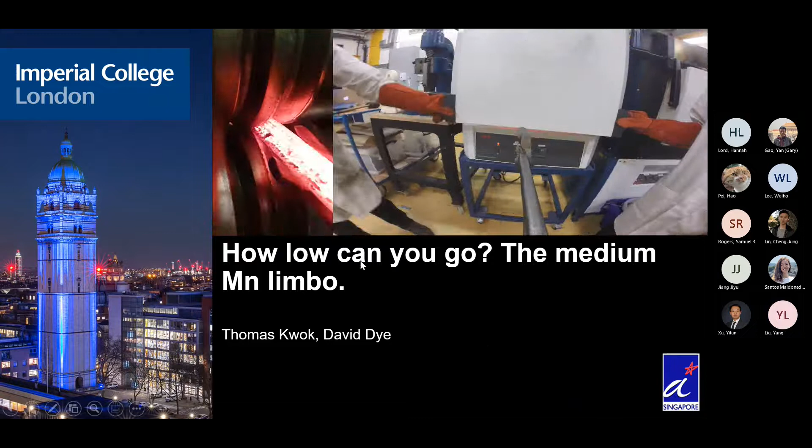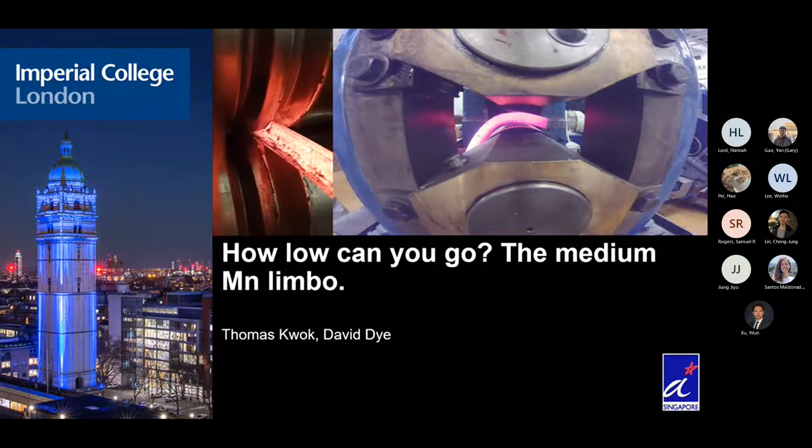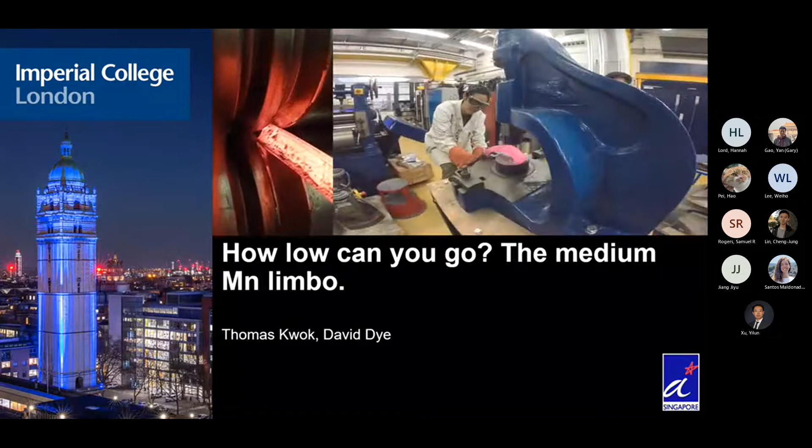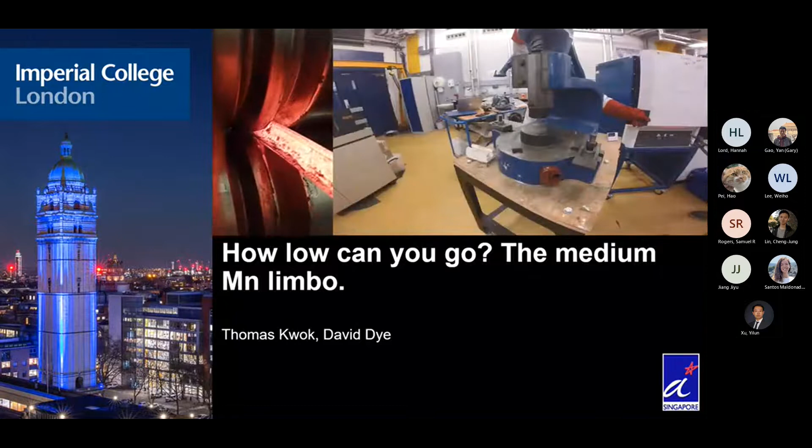So today we have Dr. Thomas Kwok. He finished his PhD here in October 2022, so congrats again. He also did his bachelor in engineering at Imperial College, and after he finished in 2015, he went back to Singapore and worked as a research engineer at the Singapore Institute of Manufacturing Technology, which is a research institute under A*STAR, the Agency for Science, Technology and Research. In 2018, he got an award in the National Science Scholarships, and this allowed him to come back to Imperial and pursue his PhD. So now we're going to have his wonderful talk, and I'm hoping that you would enjoy it.

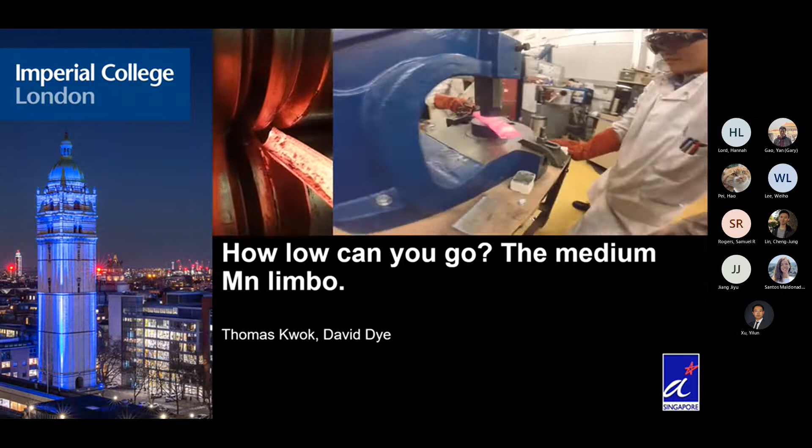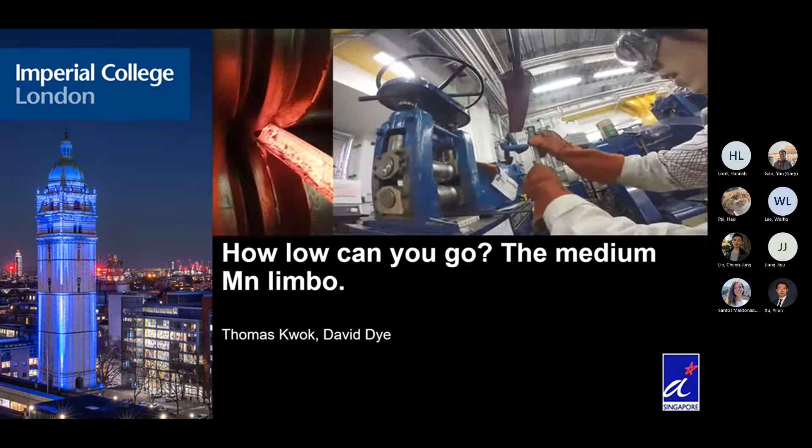So my name is Thomas, and today I'll be giving a talk on the medium manganese limbo, which is really about how do we preserve the TWIP effect in these medium manganese steels with decreasing manganese content. This work was mostly done by myself, also with Dave, and also our collaborators. And before I begin, I just want to thank A*STAR for very kindly sponsoring this PhD.

So a little bit about myself. After my A-levels, I went to join the Singapore Army for 2 years when I was an artillery officer. It was a good character-building experience, but never again. After that, I came here to this very same department to do my BEng in material science, and this is where I met the boys. So I met Yanis, Benwood, Mezan, and also Dave.

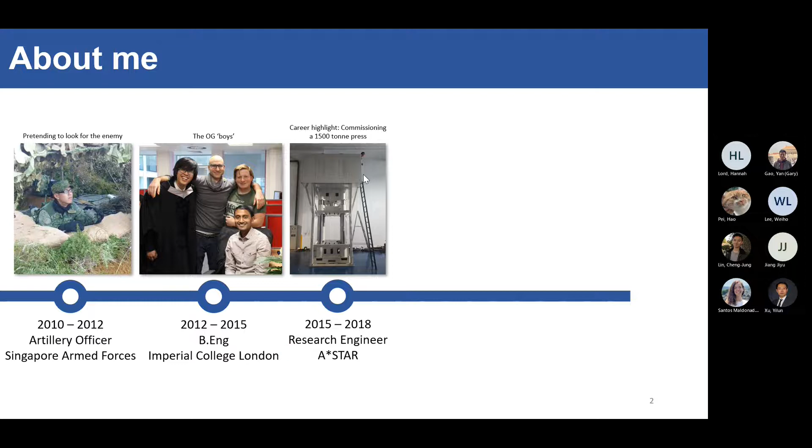And this was really when the medium manganese journey actually began, starting way back in 2015. I went back to Singapore to work as a research engineer in A*STAR, and what I was working on was the squeeze casting of aluminium and magnesium alloys. One of my career highlights was helping to commission this epic press. So that over there is our client, our happy client, standing on top in the oil box, and that gives you the scale of the size of these machines. After that, working in research, you feel that you need a PhD to really get anywhere.

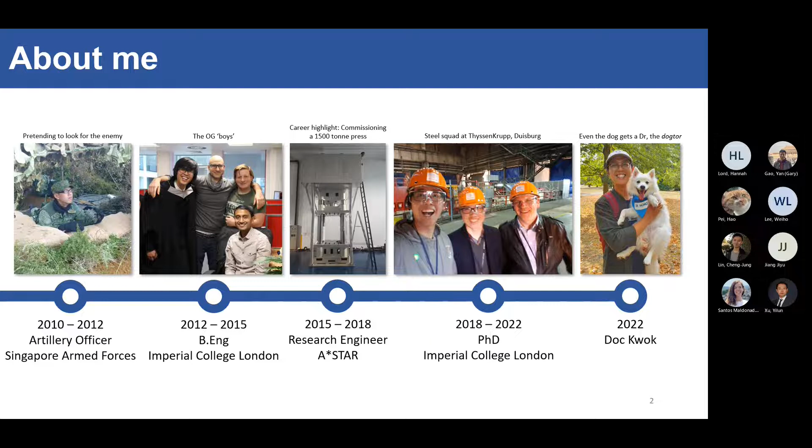So I came back, working with Dave again on high strength steels, and this is the steel boys enjoying a day out at ThyssenKrupp in Germany. And then finally, earlier this month actually, finally I'm Dr. Kwok, or Doc Kwok for short.

Okay, so I thought I'll do something a little bit different this time. Whenever you come to a talk, you only present the nice, shiny results, right? So I'm going to try and big up myself and look a bit like Iron Man, present all the nice stuff. But I've also been on that side of the lecture hall looking at talks like these, just constantly being overwhelmed, thinking to myself, there is no way I will ever be good enough or have good enough results to present in a talk like this. So during this talk, if you ever see a blue banner on the right side, I'm just going to present a little bit of the behind-the-scenes actions, just to show you that these results didn't just drop out of nowhere. There was a lot of work behind it. And if I can do it, so can you.

All right, okay, so some very quick steel metallurgy recap. So here we have our iron carbon phase diagram. When you solidify steel, first you form your delta ferrite right at the top, and then it transforms into austenite, that's your FCC phase. And then you get alpha ferrite, which is your BCC phase. You will notice that martensite is not in this phase diagram because martensite is not an equilibrium phase.

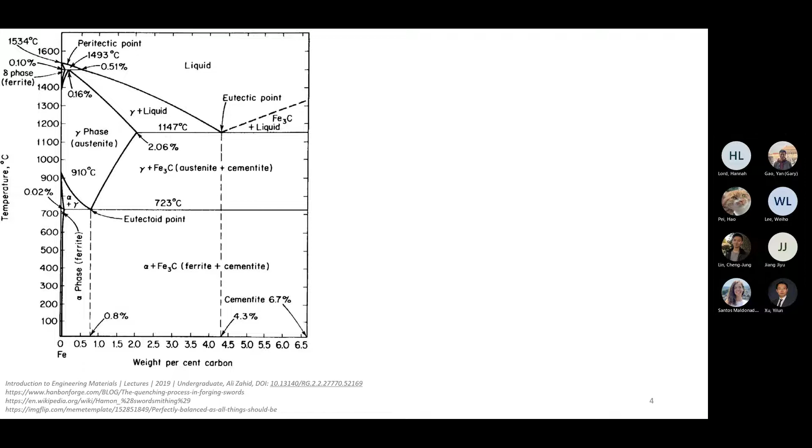You get martensite when you heat your steel up to the austenite phase and then quench it down. Your FCC crystal tries its best to transform into BCC, but it can't really do it because of all the carbon in the way. That's where you get martensite, a very hard and also very brittle structure.

The other way you form martensite is when you have metastable austenite, stabilized down to room temperature. It's metastable because if you give it a bit of stress or strain, that gives it the energetic kick to form martensite at room temperature. That's a very gross oversimplification of the TRIP effect, or transformation induced plasticity effect.

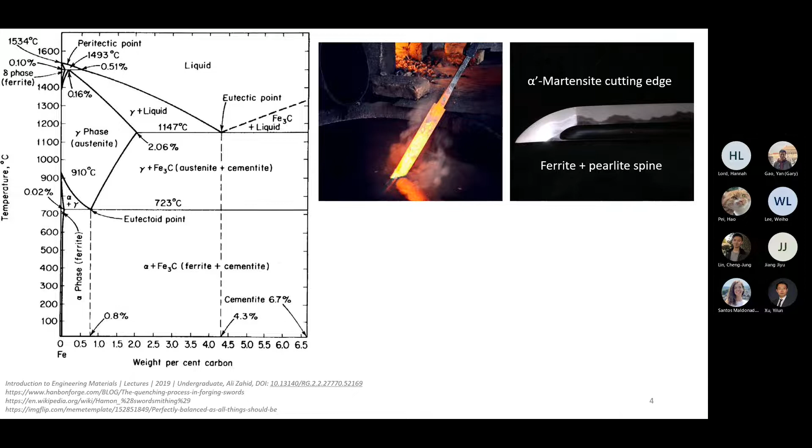In steels you also have more alloying elements other than carbon: manganese, nickel, chrome, aluminium, silicon. These elements split into austenite stabilizers, which make the austenite window bigger and can even stabilize the austenite phase down to room temperature, and ferrite stabilizers, which do the opposite and make the austenite window smaller.

These austenite and ferrite stabilizers affect things like austenite stability, meaning stability against transformation into martensite, and also stacking fault energy, which affects the TWIP effect, which I'll talk about later. Depending on the plasticity enhancing mechanisms you want in your steel, your austenite and ferrite stabilizers have to be perfectly balanced, as all things should be.

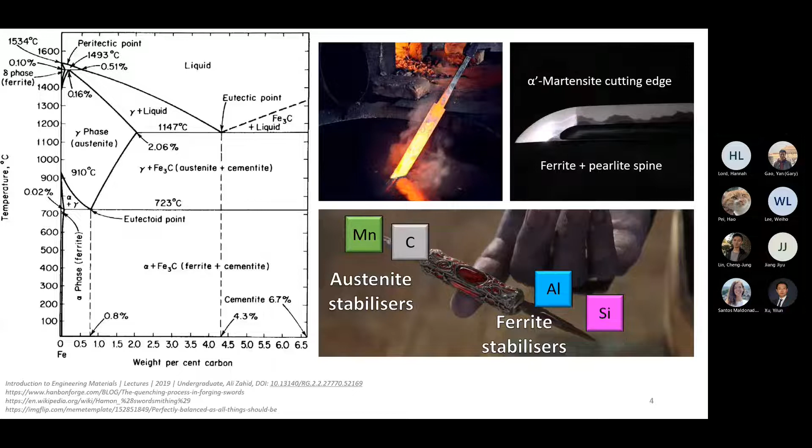My talk is about medium manganese steels, which really implies the existence of high manganese steels. These high manganese steels are about 16 to 30 weight% manganese and also quite high carbon content, about 0.5 to 1 weight% carbon. When you deform them, in addition to dislocation glide, you form these very nice twins.

These twins are very fine, and you see these red lines here in the IPF map. That's actually a bundle of twins, and within that red line there are even finer twins. What these twins do is continuously fragment your grain.

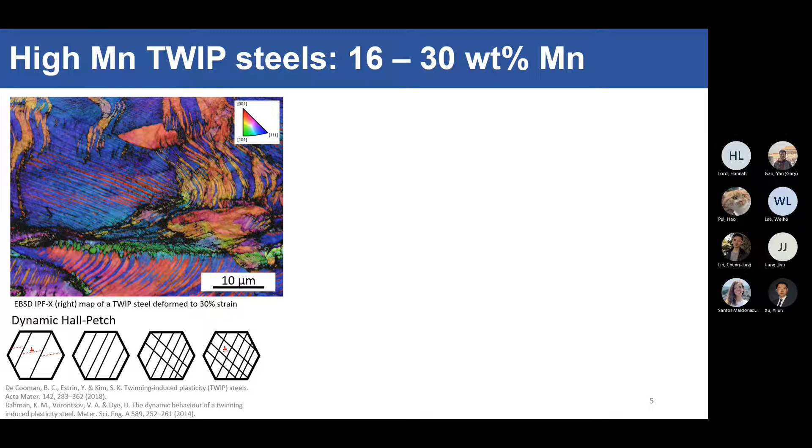You keep chopping up the grain into smaller and smaller parts in what is called the dynamic Hall-Petch effect. You start straining, form two twins, which refine the dislocation mean free path. Strain it some more, you get more twins, then activate a second twinning system. Eventually your mean free path is so small the dislocation finds it very hard to propagate, and that's where you get strength from.

If you look at the tensile curve, TWIP steels have massive elongation. That's because of the TWIP effect giving continuous hardening all along the tensile curve. This is the fully recrystallized version. You can trade some of the elongation for strength, making it very strong, up to more than 1 gigapascal.

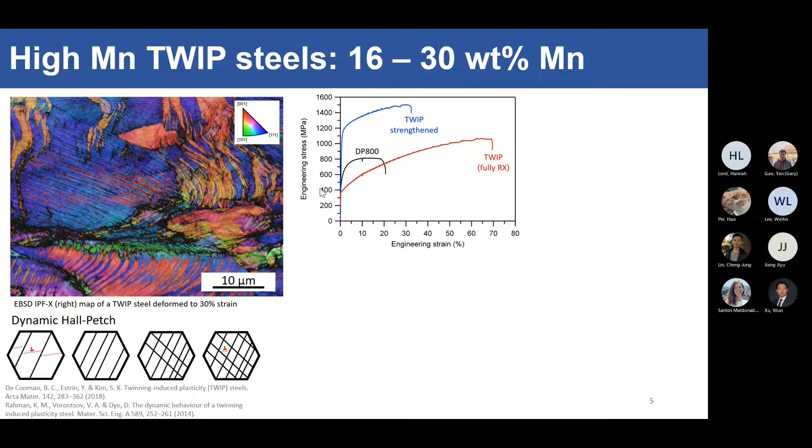What these TWIP steels are really good for is absorbing energy. If you think of energy absorbed as the area under the stress-strain curve—this should be engineering true, but never mind—these steels absorb a lot of energy when they deform, much more than the DP800 steels, which is the current energy absorbing steel in your cars right now.

Somebody did an actual test called the axial drop tower test. You make a box of steel, drop something heavy on top in a very Tom and Jerry kind of way, and it falls and crumbles like that. You can see TWIP steel is by far the best energy absorbing steel. The idea was to put them in cars, like your crash box, in this part over here.

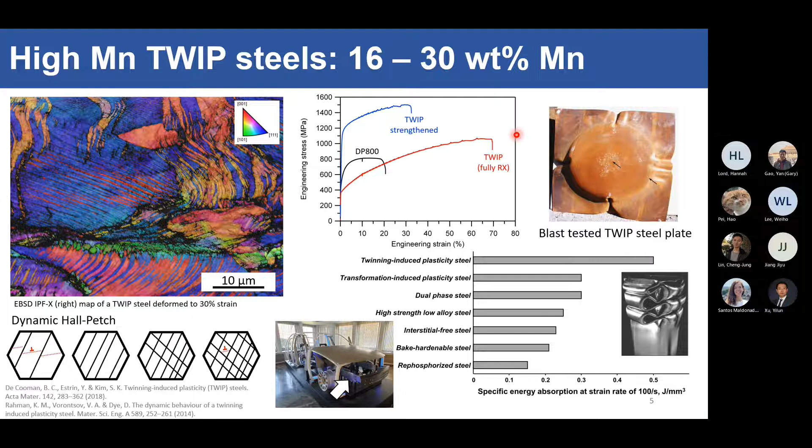If you can absorb crash energy, you can absorb blast energy as well. This is a plate of TWIP steel made by Tata Steel, and a few years ago Dave and Mazan went to blow it up. You can see that the TWIP steel was actually very capable of absorbing that blast without cracking.

So if TWIP steels are so awesome, how come we don't see them everywhere? That's because TWIP steels are incredibly hard to cast and fabricate—this is a very high alloy steel, right?

If you cast a very high alloy steel, you get massive segregation to the interdendritic boundaries. This is some work by Aachen University. They have this really crazy forging and annealing strategy to try and homogenize the ingot, and you can see there's a large variation in manganese even after their homogenization strategy. This means you have different stacking faults in your austenite phase, and locally you have different TWIP effects going on, and that's not good.

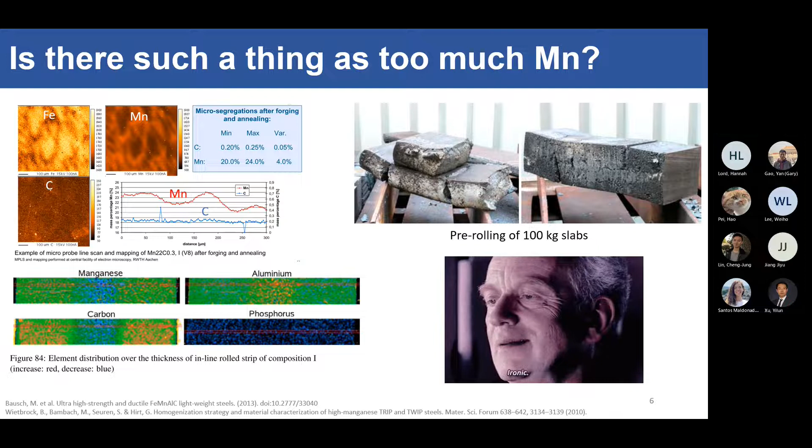If you don't homogenize it properly and just decide to roll it anyway, your ingot breaks, so you have very poor hot ductility. But even if you try to homogenize it properly and manage to roll it, you still have very large segregation of manganese, aluminum, and carbon as well. So it's extremely ironic that the high manganese content, which enables the TWIP effect, is also what's hindering the widespread commercialization of these high manganese TWIP steels.

So the research question now becomes: can we make a manganese-lean TWIP steel? TWIP good, too much manganese bad, right? So can we make it with less manganese and see what happens? And the answer is yes, otherwise I wouldn't be presenting today.

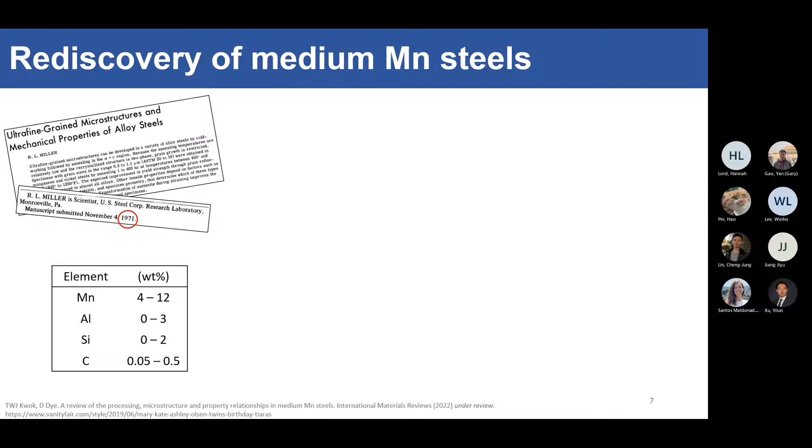Back in 1971, this solo warrior R.L. Miller actually made the very first medium manganese steel. In fact, we're actually rediscovering his work right now. Modern medium manganese steels now have 4 to 12 weight percent manganese. This is a big reduction of manganese content compared to your TWIP steels, which was 16 to 30 percent. So we are at way, way lower levels right now.

The key to medium manganese steels is this thing called element partitioning. Because we've reduced the amount of austenite stabilizers, your microstructure is now both austenite and ferrite at the same time, it cannot be fully austenitic anymore. So if you take your steel and heat it into the two-phase regime, what happens is that your manganese and carbon partition into the austenite, while aluminum and silicon partition into the ferrite phase. You hope you can enrich the austenite phase in manganese and carbon to a sufficiently high level to enable twinning.

You can actually simulate this in Thermocalc. You can plot the phase fraction evolution with temperature, then plot the austenite composition with temperature, and then plot the change in stacking fault energy with temperature. So this means that if you do an intercritical annealing heat treatment between 650 to 750 degrees, you might have your stacking fault energy just high enough to enable twinning in this particular steel.

So again, the research question becomes: how do we adjust composition and play around with processing parameters that really promote twinning in the austenite phase in medium manganese steels?

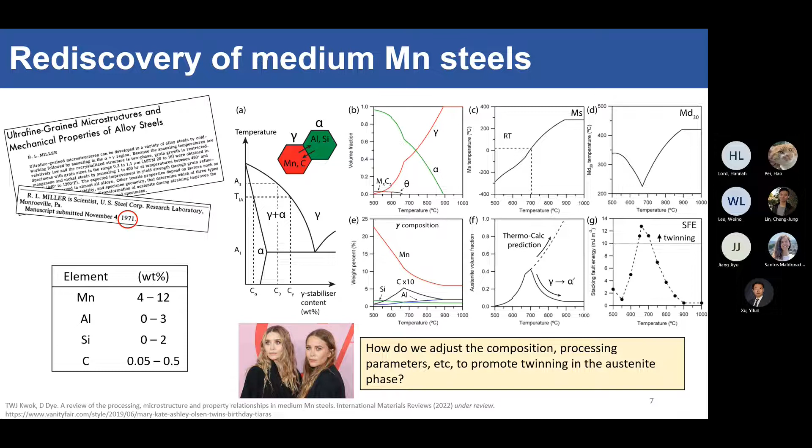This is the first steel that we developed, with 12% manganese. This steel I developed in my undergrad and then finished off in my PhD. So there's a long history to this steel.

For this steel, we warm rolled it at 700 degrees, which is within your two-phase region. What this does to the microstructure is elongate your austenite grain, and with every pass you add something called a necklace layer around it. This necklace layer is a layer of very fine austenite and ferrite grains, because you don't have enough energy to cause full recrystallization, so it only recrystallizes on the outside. With every pass you add a layer, and a layer, and a layer, until finally you have a microstructure that looks like this: a very highly deformed austenite core surrounded by necklaces of very fine ferrite and austenite grains.

Now we do a tensile test, and we realize that, number one, you've got absolutely stonking strength, more than 1 gigapascal. And you've got more than 50% elongation, which is massive.

You can see that the deformation has two stages, a flat bit and a diagonally increasing bit. We did some interrupted tensile testing to find out how the microstructure evolves and how that affects the tensile behavior. I had a magnifying glass for this, but I can't do it on the big computer, so you'll have to trust me on this.

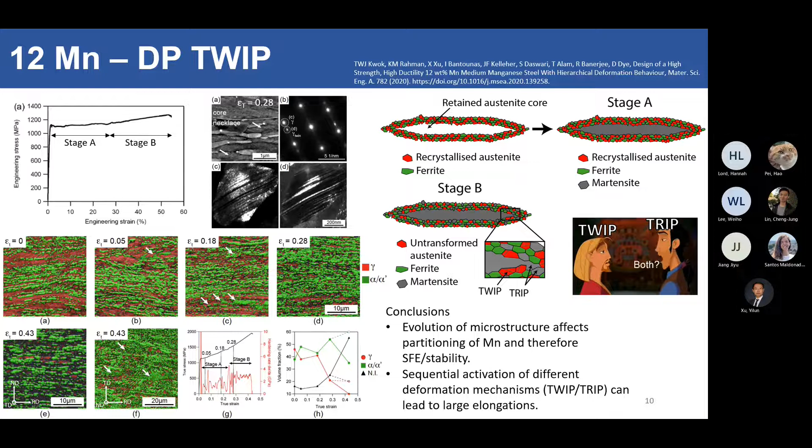What this tells us at the end of the day is that the evolution of microstructure actually affects the partitioning of manganese, which then affects things like austenite stability and stacking fault energy. But more importantly, we can use the TWIP and TRIP mechanisms together to give very large elongations in medium manganese steels. This TWIP plus TRIP mechanism we found is really, really good, but we want both of them to occur together in the same grain.

We don't want some grains tripping and some twipping, because that gives you this very horrible serrated tensile curve, which is not good for metal forming purposes. So we want TWIP and TRIP to be occurring within the same austenite grain.

Literature says you can do this in two ways. You can have it in the successive manner: you form the twins first, and then the twin intersections become very potent nucleation sites for martensite to form. The twins crossing each other don't immediately lead to martensite, but they form a potent nucleation site. If you're from my part of the world, that actually looks like Ultraman, don't you think? Okay, never mind, moving on.

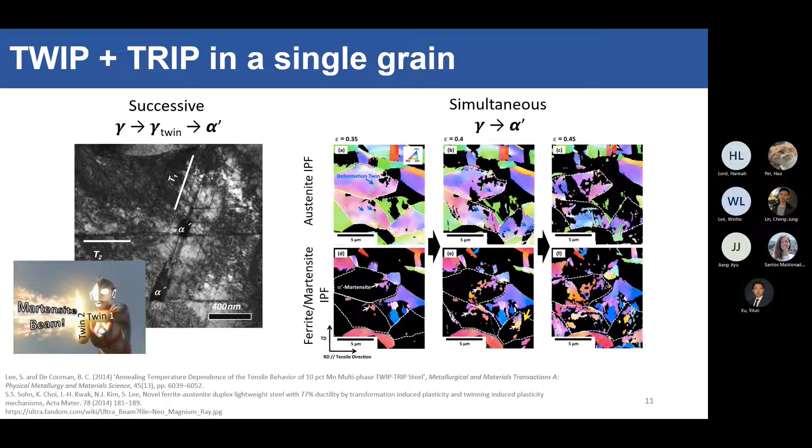The other way to form TWIP plus TRIP is the simultaneous effect, meaning your twins and your martensite form together independently of each other. There is no relationship between the twinning and the tripping together. So there are two ways to form this TWIP plus TRIP mechanism.

So we move on to our next alloy, 8 manganese this time, coming down from 12 to 8. This is the 8 manganese steel that I lovingly call Novalloy, it's the novel alloy, hence Novalloy. This is also quite a highly alloyed steel, with very high aluminum and silicon content, and similarly quite a high carbon content. We've deliberately added tin, as it's been reported that tin helps the galvanizability of this steel.

In the as-annealed condition, you can see we've got again very nice high strength, 1 gigapascal, and also 40% elongation. Somebody once came up to me and said, do you ever cold roll your steels? I said no, why do you need to cold roll it, this is already quite strong. He said, oh no, cold rolling is good for dimensional control, you can make your steel even stronger if you wanted to. I said oh okay, let's cold roll our steels, give it a go.

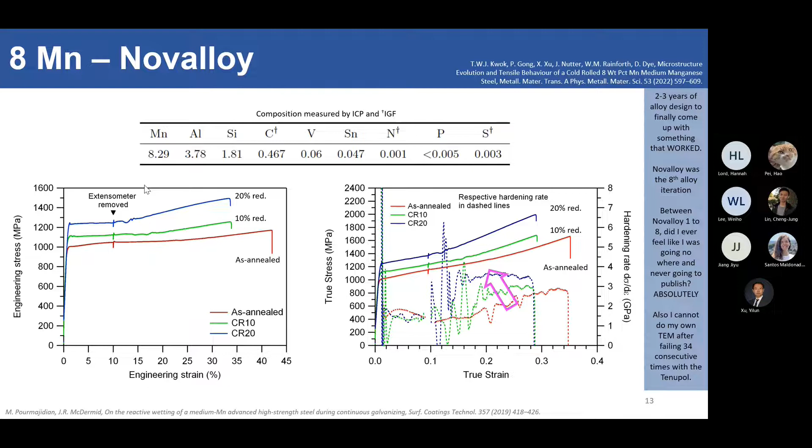To get stronger. What's interesting is this introduction of a very flat stress plateau called the yield point elongation. But more interesting to me is this bit where the strain hardening rate kicks up higher. That means we're changing the hardening behavior of these steels, and I really wanted to know why.

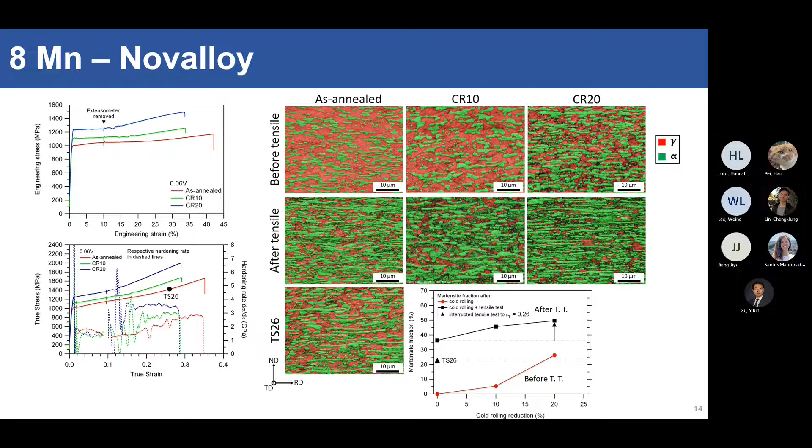So what this tells us is that twinning in medium manganese steels is strain path dependent. Whether you cold roll it or uniaxial tensile, it makes a difference to the amount of twins that you form. And the difference in the amount of twins affects the density of twin intersections, which are the potent nucleation sites for martensite to form, right?

So by cold rolling it, you're introducing more twins and therefore more twin intersections, and that is an alternate pathway to form martensite compared to pure uniaxial tensile. Because when you only do a uniaxial tensile, you don't form these twins, you don't have a lot of twin intersections, so you can only really form these very large grain boundary martensites. So at the end of the day, we have more martensite in the cold roll samples because we provided it with a mechanism to form.

And that's why we see the higher strain hardening rate here as well, and also higher UTS at the end of the day because you've got more martensite. So to summarize, we can say that cold rolling first consumes the TWIP effect to actually enhance the TRIP effect later.

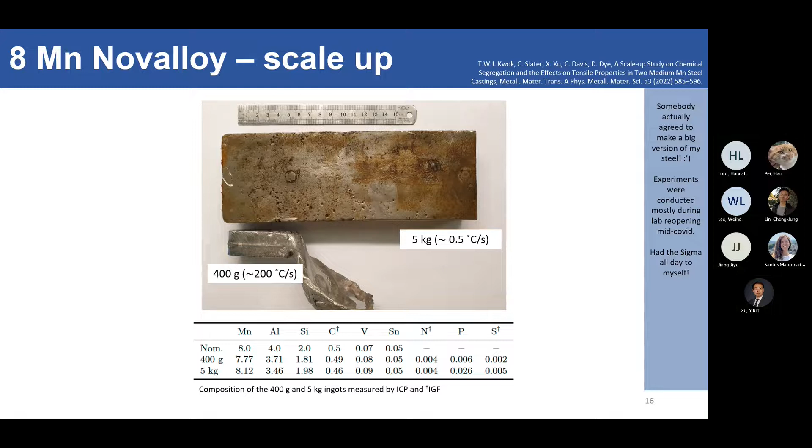So this big ingot has been solidified very slowly at 0.5 degrees per second, and that's representative of what you see in the industrial continuous casting process. We cut it up into small chunks, and then homogenize it at 1250 degrees, which is what you see in a continuous reheating furnace, for different times.

But anyway, you only have 2 hours to reheat your steel, so we are stuck with this microstructure. We have a little bit of delta ferrite left. Okay, we'll live with that. But we want to see whether the matrix, the rest of the steel, is homogeneous or not.

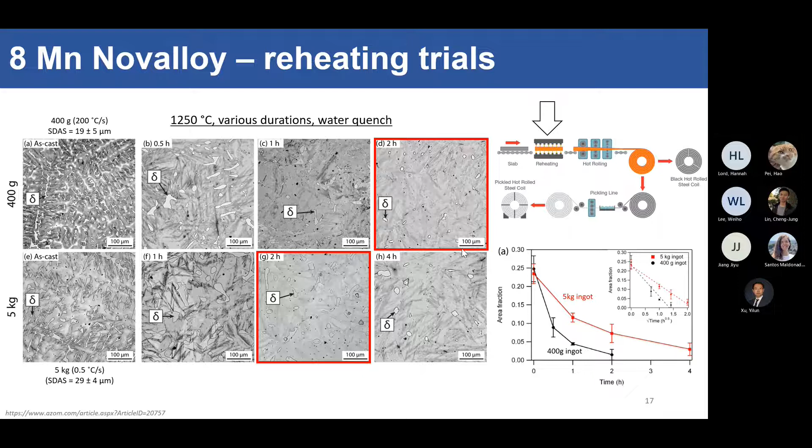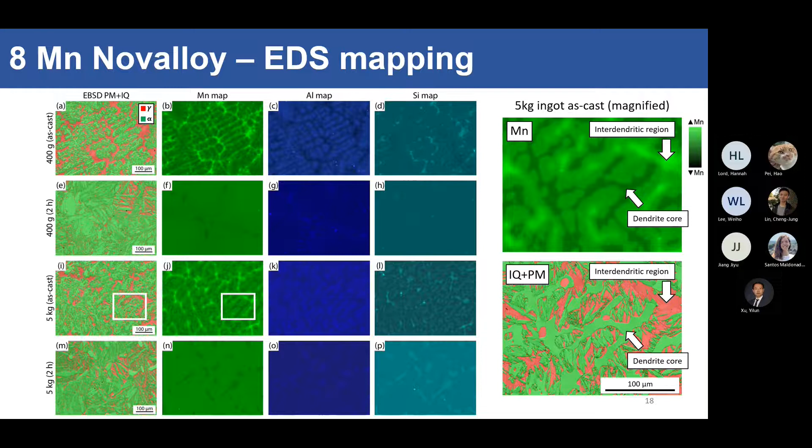But you can't publish a paper and say something's green or more green or less green, so you need to put some numbers on it. What we did was an EDS grid scan across the same microstructure, and then we arranged the data using this weighted interval rank and sort system, WIRS. Let me explain.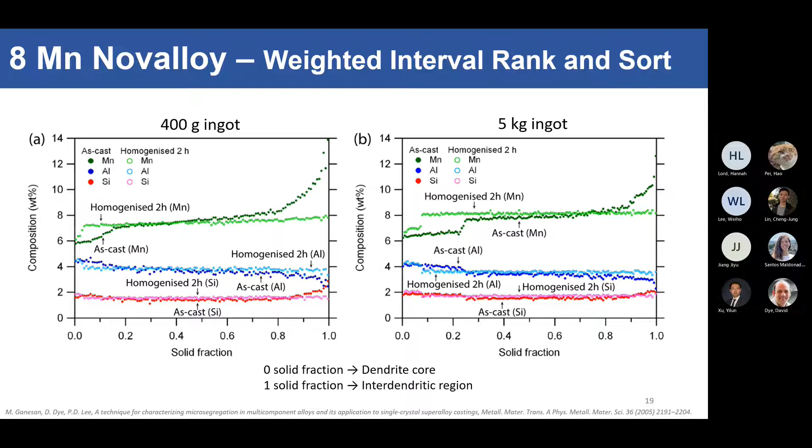That's great news for us, but we've got the leftover delta ferrite left in your steel, and you're going to roll it, and it's going to be in your final microstructure. So we wanted to know how bad is it going to be? How does it really affect your steel in a bad way or in a good way? Who knows? So we rolled it out anyway, and then we did tensile testing on it.

So this is great. We've actually proved that you can homogenize medium manganese steels, and take note that this is a fairly highly alloyed medium manganese steel. So if you dial back the aluminium and silicon content, you can actually remove delta ferrite in the final microstructure totally. And that's great news for medium manganese steel, in the industrialization and commercialization front.

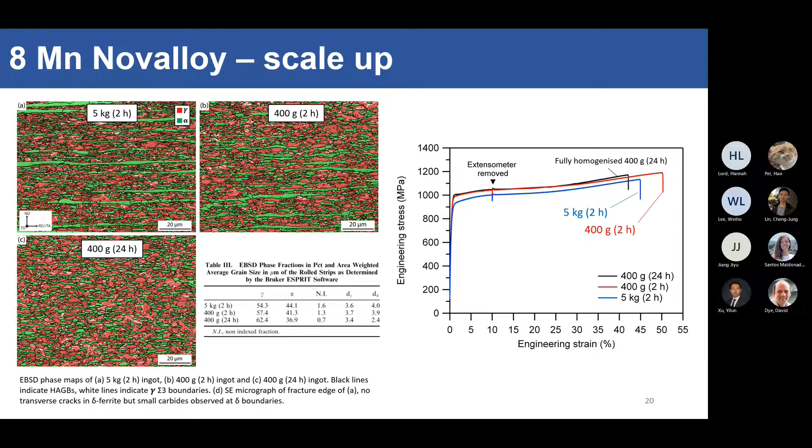Yay! All right, so we've talked about Novalloy, and then we had Secalloy, which came after that, Secalloy being the second alloy. And then now we have Triolloy, which is the third alloy.

Yes, well done. So around this point in time, we were investigating the different microstructure morphologies you have in medium manganese steels. So these steels are extremely flexible. You can produce many different types of microstructures. The first one being the equiax microstructure, everything very nice and round.

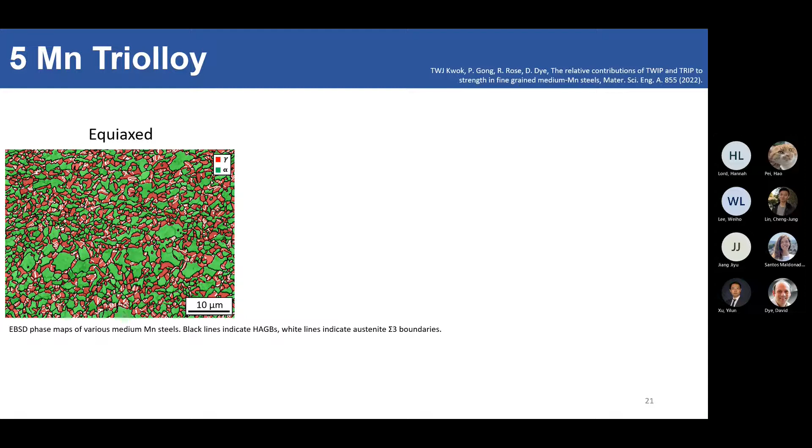So the question at the time was, which microstructure was the best in terms of tensile properties, toughness, and stuff like that? These three microstructures can't possibly deform in the same way, right? One of them has to be better than the other. So that was the subject of our next study.

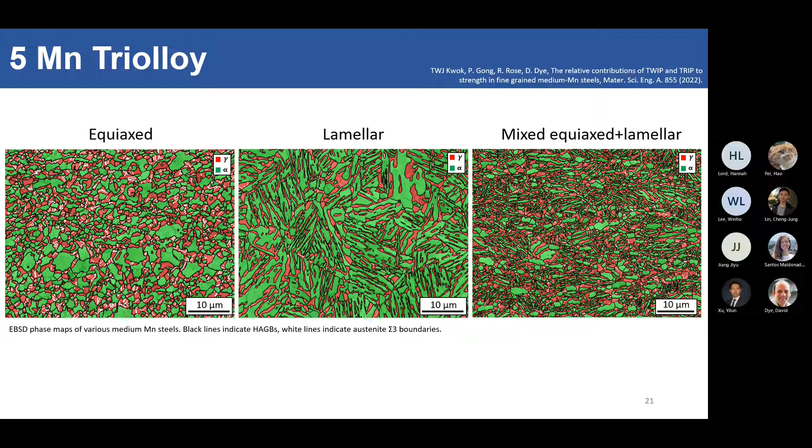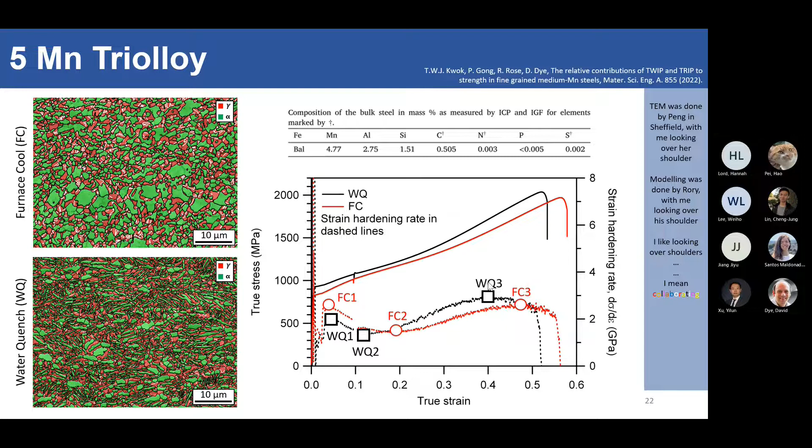But as you can see, they actually deform in the same way. So what's going on? They can't possibly be deforming the same way, right? So what we did was some interrupted tensile testing again, and then we took a look at the first peak, the saddle point, and then the second peak again to find out what's really going on in the microstructure to explain the tensile behavior.

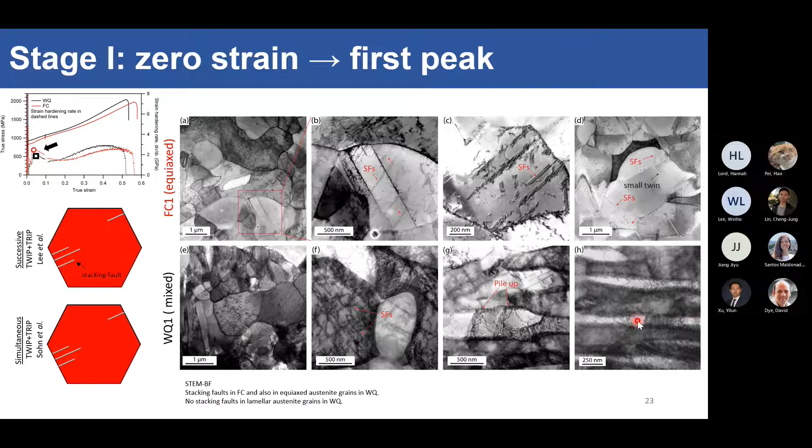If you look at the first peak, you can see in the FC sample a lot of stacking faults forming in the austenite grains. This is what the literature says you should be forming. If your austenite was deforming by the successive method, then you form some stacking faults here. If your steel was deforming by the simultaneous method, then you still have some stacking faults, but they will be different later on. In the water quench sample, you also have some stacking faults in the slightly more rounded austenite grains, but in the lamellar austenite grains, what you have is dislocation pileups and also dislocation generation at the lamellar boundaries. Not a lot of stacking faults going on in there.

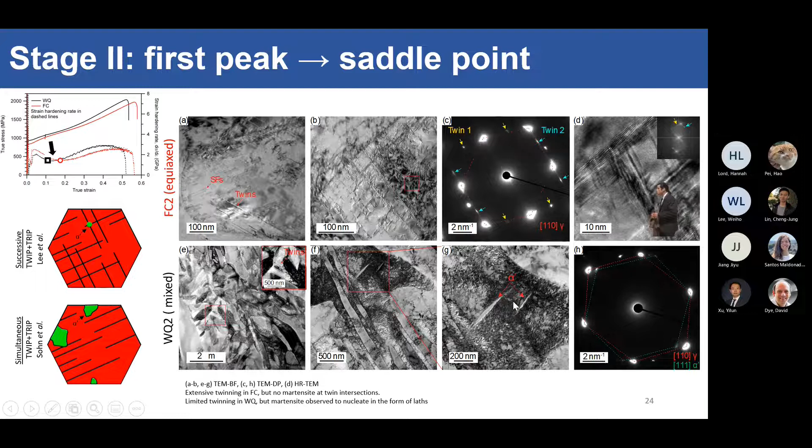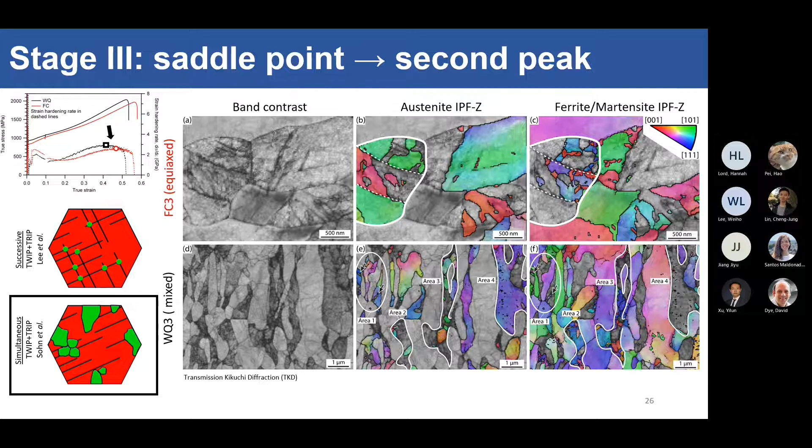In the water quench sample, it's a bit trickier to see, but again I've highlighted some areas in white, and you can see within this grain, again martensite grains starting from the grain boundary, then working their way in. So to summarize again, both of these steels have a very similar martensite nucleation and growth mechanism.

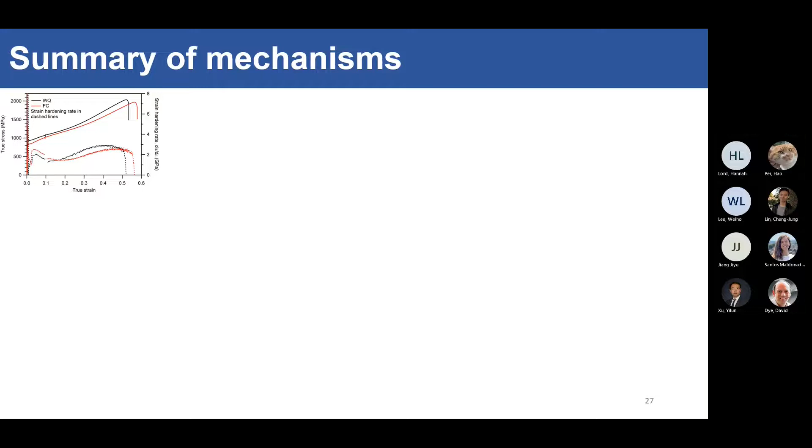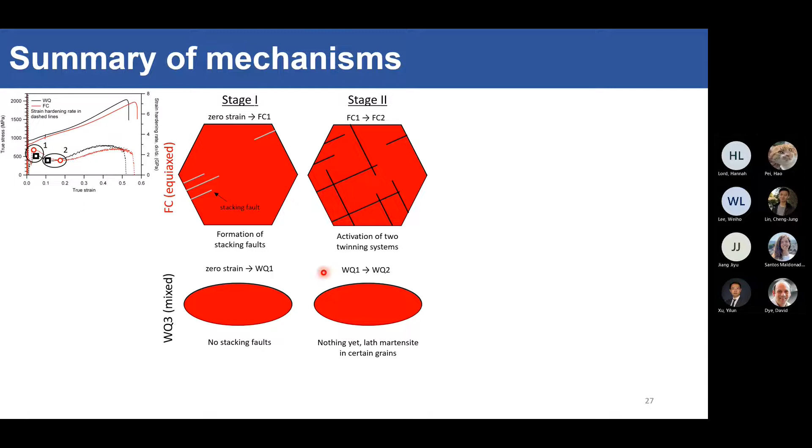Let's summarize if you're a bit lost with all the TEM - I've summarized it nicely in this diagram. In stage 1, we have stacking faults in the FC steel, with nothing really going on in the water quench sample. In the next stage, you have well-established twinning systems in the FC steel, but again nothing much happening in the water quench sample.

In stage 3, you start to get martensite growing off the grain boundaries, and then it works its way in with increasing strain. In the water quench sample, you finally get some twinning, and we know twinning stress increases with decreasing grain size. This lamellar thickness is only about 100 to 200 nanometers.

That's why twinning was delayed to a much higher global stress and strain. So finally it does twin, and then martensite grows off the grain boundaries and works its way into the middle. At this point, we start to think about whether the grain boundary area to volume ratio plays a part in martensite formation. In the water quench sample, you have a much higher grain boundary area to volume ratio, so you'd expect more martensite.

So we measured the martensite fraction with EBSD again, and it's true - we do form more martensite in the water quench sample, which is great.

So now we took everything we'd learned and fed it into a constitutive model. This model was developed by Lee and De Cooman, who really pioneered this medium manganese field. You can see we've got fairly good agreement with the stress-strain curve. It overshoots a little, and that's because the model doesn't quite account for this slight yield point elongation. We've also got good agreement with the rest of the strain hardening curve for both the FC and water quench samples.

Now, because we know this is simultaneous TWIP plus TRIP, the model lets us separate the twinning contribution from the tripping contribution - the contribution to strength from the TWIP and TRIP effects. We can plot them on this graph.

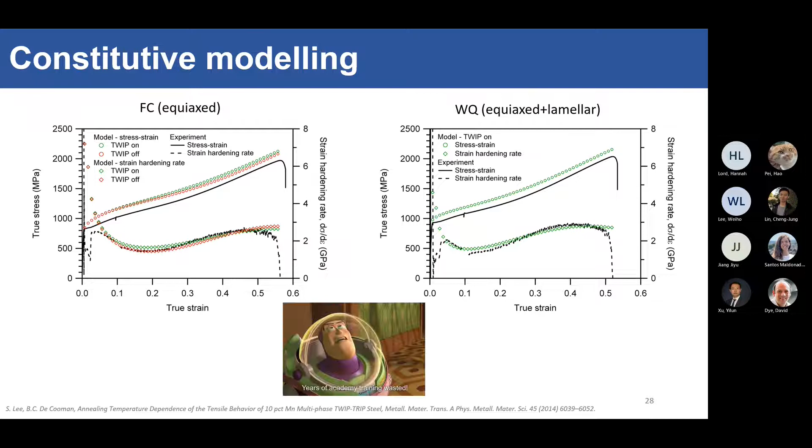So TWIP-on is the green line, TWIP-off is the red line. You can see in the FC steel there's almost no difference between TWIP-on and TWIP-off. This model here absolutely shatters four years of work developing a manganese-lean TWIP steel, because your TWIP does almost nothing for your steel.

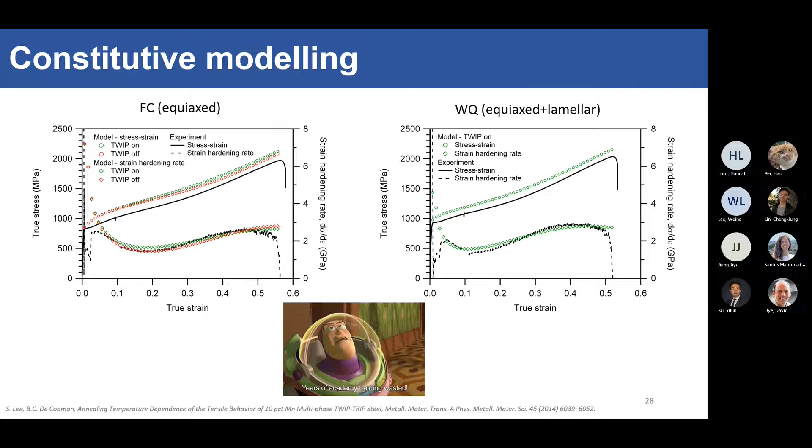I didn't even plot TWIP-off for the water quench steel because it was almost exactly the same. Your TWIP effect does very little for your steels. So very sadly, the TWIP plus TRIP effect was actually largely dominated by the TRIP effect rather than the TWIP effect.

These are very fine-grained materials, and it's very hard to make a fine-grained material stronger by subdividing it again into much smaller packets - this is the dynamic Hall-Petch effect.

Also, you are continuously losing austenite to martensite transformation, so the amount of austenite left to twin constantly decreases, and that's why the contribution from austenite goes down with strain.

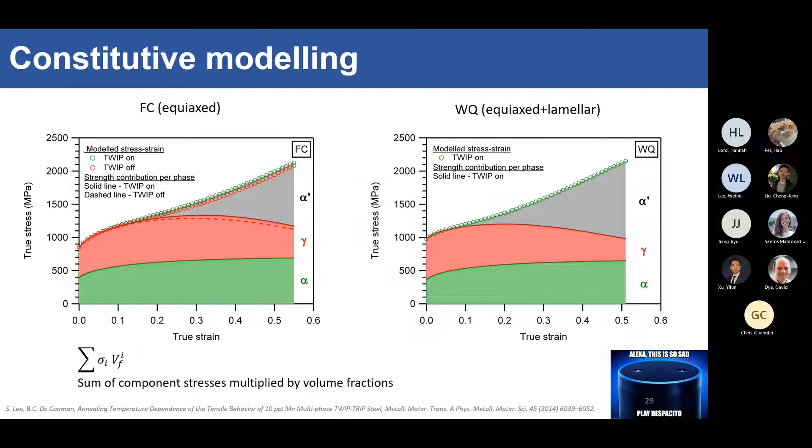So what this means for medium manganese steel is that we really need to reevaluate how we look at it - not as a manganese-lean TWIP steel, but actually as a manganese-rich TRIP steel.

So after many sad times, we went back to the drawing board and developed a new alloy: Quadralloy, the fourth alloy. In the Quadralloy sample, we've decreased the carbon content significantly, from 0.5 down to 0.2 - a reasonable, weldable carbon composition.

All the tensile tests I've been presenting were quasi-static. But remember, these steels we wanted for energy absorption, so we need them to be tough. At the end of my PhD, I finally did a toughness measurement using a Charpy test.

I suspect it's something to do with the carbon content, as well as some other microstructure factors. So this is a paper in progress.

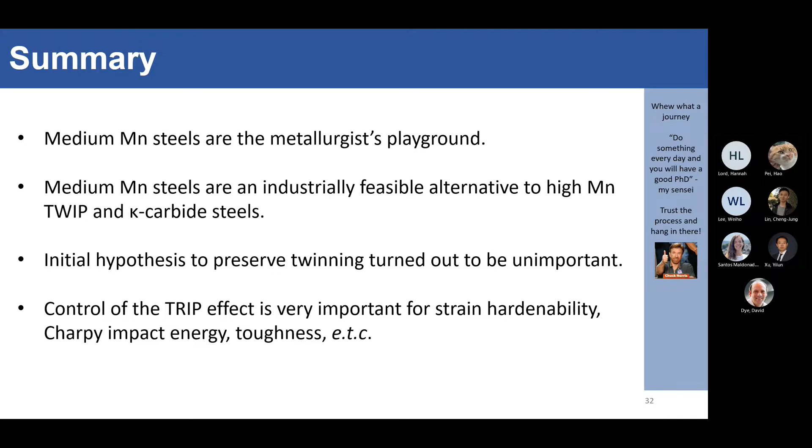So potentially, if you have the double twinning, you will form the epsilon martensite instead of alpha martensite, right? But the double twinning effect, I think in the medium manganese steels - I've seen some papers argue that the carbon percentage will be important for the twinning effect to increase if they drop the carbon percentage, so that you can have the double twinning of the austenite, so that we can form the martensite in the middle.

Yeah, exactly. So the carbon content of these steels is extremely important. Carbon has the largest effect on the stacking fault energy of the austenite phase. Your epsilon martensite forms when your stacking fault energy is too low, so it forms epsilon rather than twins. But epsilon martensite doesn't really give you a lot of strength, so we raised the stacking fault energy a bit more, adding more carbon to get twins instead of epsilon martensite. We've also noticed that if you add a lot of carbon and go beyond about 23 to 30 millijoules per meter squared stacking fault energy, then you transition from the successive TWIP plus TRIP into the simultaneous TWIP plus TRIP mode. This is an observation - it hasn't actually been proven yet, but it's an interesting fact. It definitely needs a bit of research, but you do transition from successive into simultaneous mode when your carbon content increases, and therefore your stacking fault energy and austenite stability change. I cannot give you an answer why it does that, but it does.

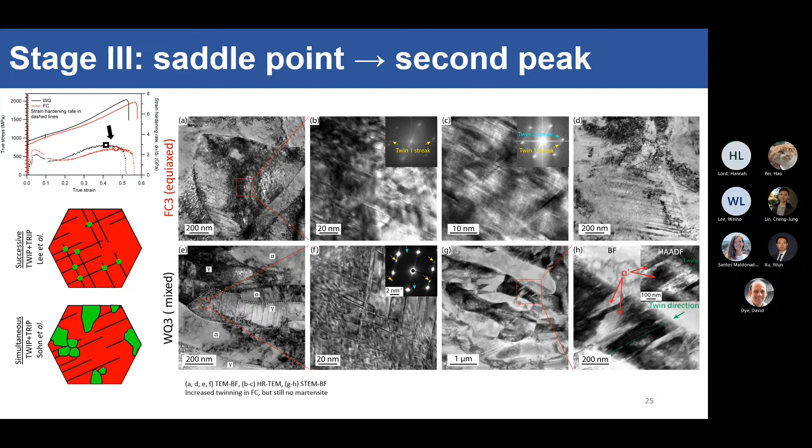Was it difficult? Because you said that the manganese was difficult to fabricate with the argon. Yes, I'm glad you asked.

I actually have a lot of little GIFs to present - sorry, these are backup slides. Never mind. So I think most of you know I said half the time I'm cleaning the melter, right? Manganese evaporates from the melt surface very easily. That's also a big problem in industry - when you have a very high manganese content, you lose a lot of the manganese to soot and stuff like that. So fabrication is not easy from an industrial point of view, but in our small melter, you can top up a little bit of the manganese, so you do arrive at the same manganese content that you want. But yes, pretty much that.

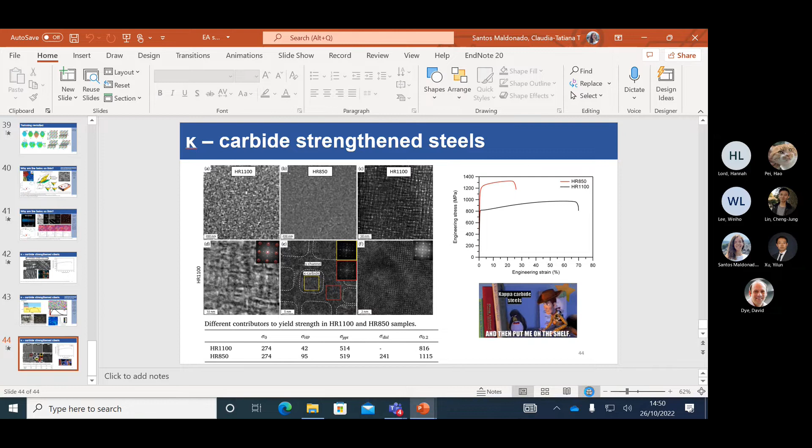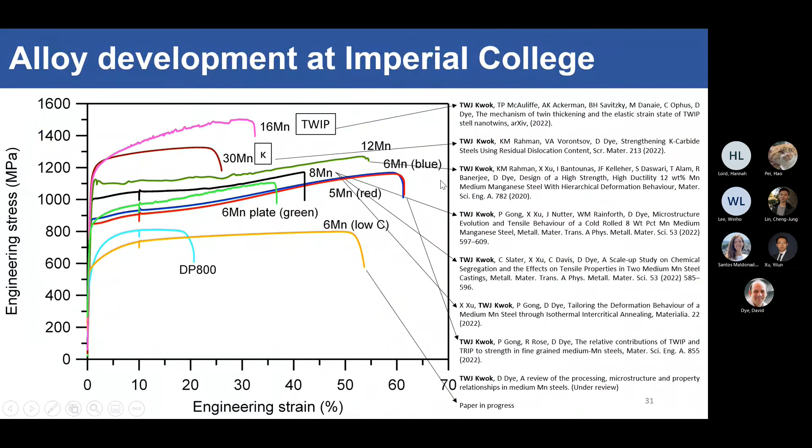Should we just go for pizza? Okay, so thank you so much, Thomas, that was very nice - we were very happy to complete it. Thank you very much. Great, pizza time, woo.